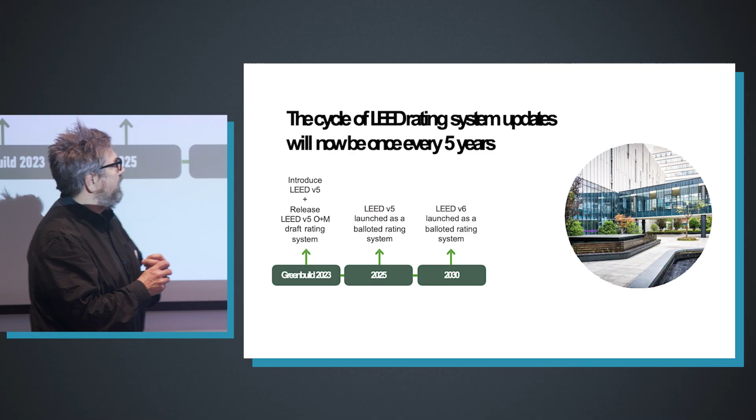So here are some of the major changes that they've talked about. The first is that the plan is a more predictable cycle of when LEED updates, every 5 years now.

Version 4 came out in 2013 -- well, really 2012, as John mentioned -- a little stale now, right? It's been around for 13 years and they haven't really updated it much, but now version 5 came out in 2025. We're going to have version 6 in a few more years, so it's going to be every 5 years.

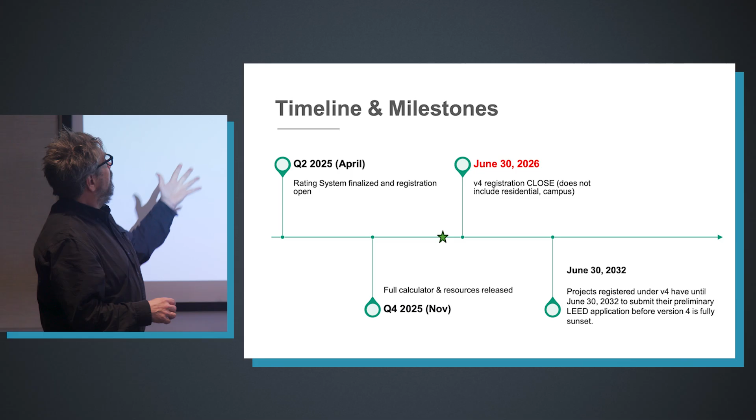And then as far as where things stand with version 5, right now it's been out for a year, but there's a concurrency period, and that concurrency period ends June 30th, 2026.

So if you have a project pursuing LEED version 4 and it's not registered, get it registered. If you have a project that is going to pursue LEED and you're not exactly sure where you want to end up, you might want to register under version 4 just to give yourself the opportunity. You can always upgrade later.

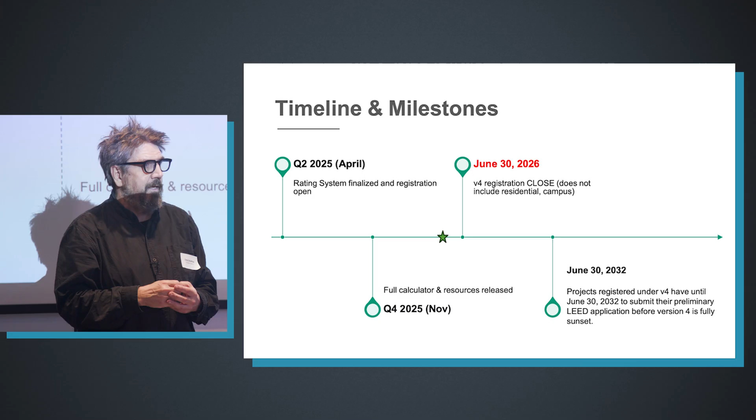Some of our clients are already on version 5, especially if we're working with public schools -- the MSBA is going to require everybody to be on version 5, if they haven't already voted that, which is happening in the next month. And other folks, especially on the private side, are locking in their version 4 so they have an easier target to hit.

And there's some time available -- if you do the lock-in on version 4, you have until June of 2032 to submit. It seems like that's like 100 years in the future, right?

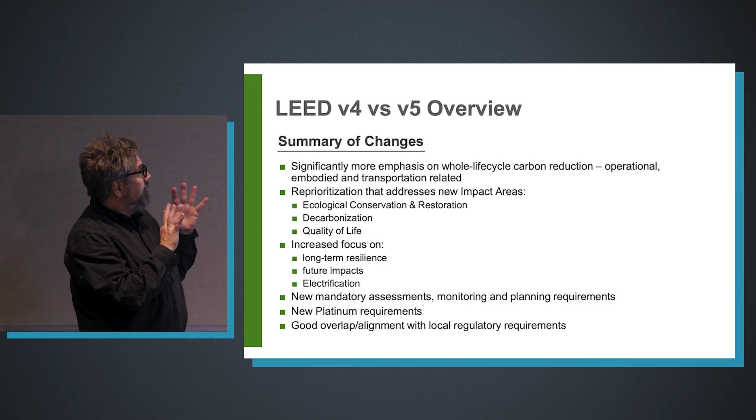So, the big picture summary of changes -- we're going to go through these in more detail -- but there's more emphasis on carbon, especially whole life carbon. We're looking specifically at decarbonization: operational carbon, embodied carbon, and the carbon that comes along with transportation.

They've organized the whole rating system into 3 impact areas: decarbonization, ecological conservation and restoration -- which is kind of what's always been there -- and the third piece is quality of life. The idea is this is really getting towards that triple bottom line, that sustainability isn't just how we protect the environment, but also how we treat people, and there's also the aspect of money -- wasting money is not a sustainable strategy, and that's not the intent in any of this either.

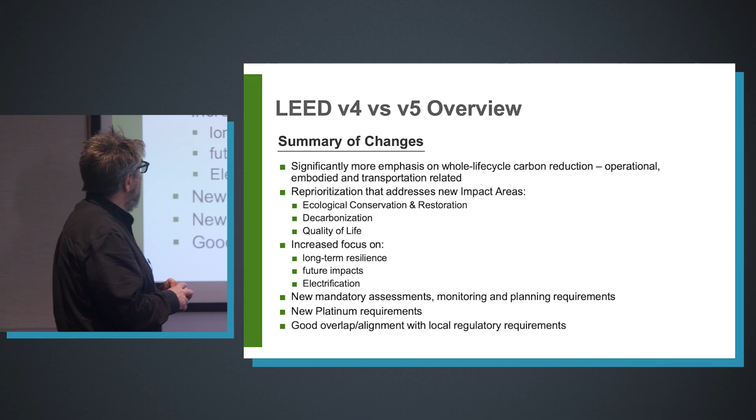Resilience comes into play. 25 years ago when I was first working with LEED, if you talked about resilience, you were admitting defeat. I guess we lost that battle, because now we're worried about resilience -- it's not about whether we're going to stop climate change, it's how can we survive this stuff.

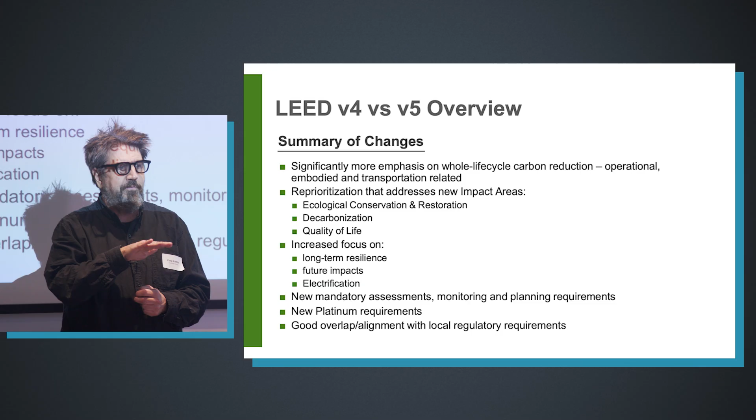And then the other big change is that they've really raised the bar, especially for platinum projects. So you'll find that getting LEED certified is probably not that much harder than under version 4, but getting LEED platinum is a lot higher, a lot harder bar now.

What's good news for us here in Massachusetts is that LEED version 5 has kind of caught up with a lot of the local regs -- we'll talk more about that -- but especially alignment around the energy code is very good here. Some of the local regs around embodied carbon line up very nicely with LEED version 5, so that's going to make things easier.

So as I mentioned, there are 3 different impact areas in version 5. It's interesting how this has evolved -- back in version 3, they had 14 impact areas.

13 of them were something called the TRACI principles, which were all just environmental impacts like eutrophication and ozone and things like that. And then there was a 14th one called indoor environmental quality. They went to version 4, had 7 different impact areas. Version 5, we're down to just these 3.

So I mentioned them already: quality of life, decarbonization, ecological conservation and restoration. And what we'll see is many of the credits try to address multiple here. It's not just one or the other, but as far as weighting of points, about 50% of the points are

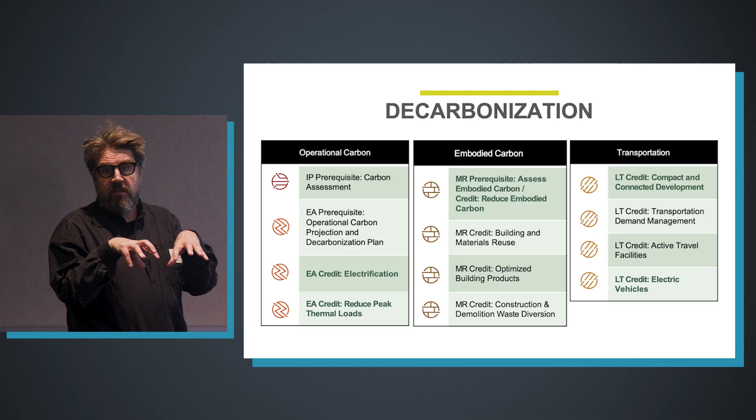around decarbonization at various levels. So some examples of things in the decarbonization bucket. Operational carbon, so this is going to be the carbon associated with the energy consumption of the building, and that gets into things like electrification, reducing loads. Embodied carbon, that's still the materials, so building reuse, picking the right products, diverting waste, and then also transportation carbon emissions, so transportation demand management, electric vehicles fit into that.

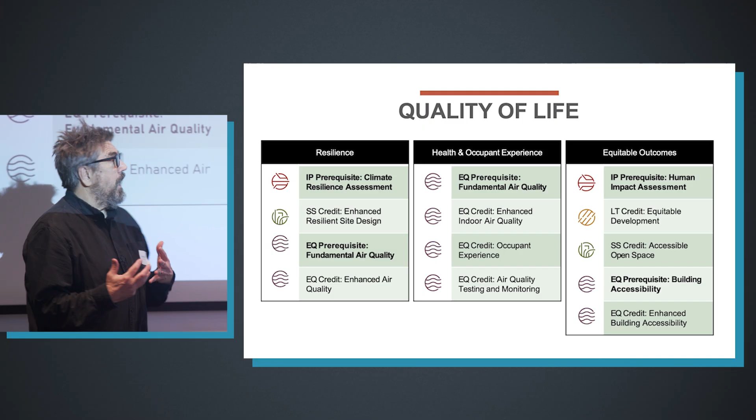Similarly, in the quality of life, specific areas include resilience. And so part of the requirements now are going to be an integrated process credit that's a prerequisite for doing a resilience assessment for your project. Lines up very nicely with the city of Boston, Cambridge, many of the MEPA requires you to do a resilience plan, look at the impacts of climate change, so it lines up nicely with that.

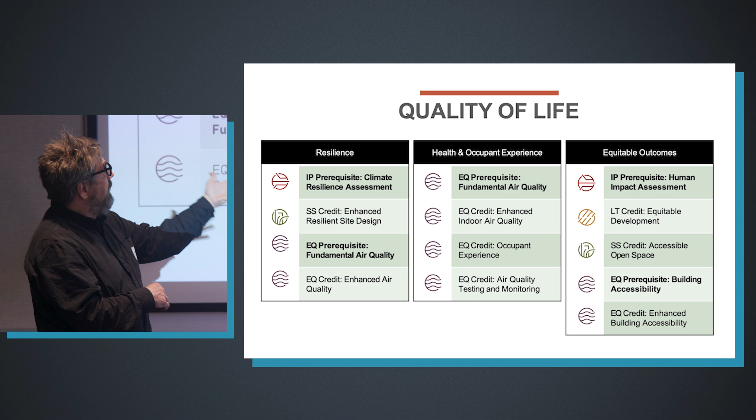Health and occupant experience, these are things that have been there before. They've kind of regrouped some of these credits to occupant experience, enhancing air quality. And then equitable outcomes, and this is one of the things that's been interesting is the names changed a little bit in the last few years because of the politics. So trying to let everybody play, but looking at equitable development, accessibility is part of the whole thing now as well. And just looking at the human impact are things they're going to look at there.

And then finally, the ecological conservation and restoration, very similar to what we've seen in the past. So we're looking at land use and stormwater and efficient resource use. Those are all parts of that approach there.

Right, so some of the things haven't changed in version 5. Still have the same certification thresholds. You're certified silver, gold, and platinum, with the note that the platinum is much more challenging. It's still structured in the same way with some of the mandatory prerequisites and then optional credits. You get credit points to achieve your certification levels. They have increased the number of prerequisites, and we'll touch upon a lot of those as we run through today.

And they've also changed the reporting, how you actually document compliance with LEED. If you've ever had experience with LEED Online, they're transitioning to their ARC platform now. What that allows for is it's a little bit more of a living platform too. There are some requirements on reporting energy and water use data that's always been in LEED, but really clunky in the delivery, and ARC is kind of making it such that they're going to be able to report that information.

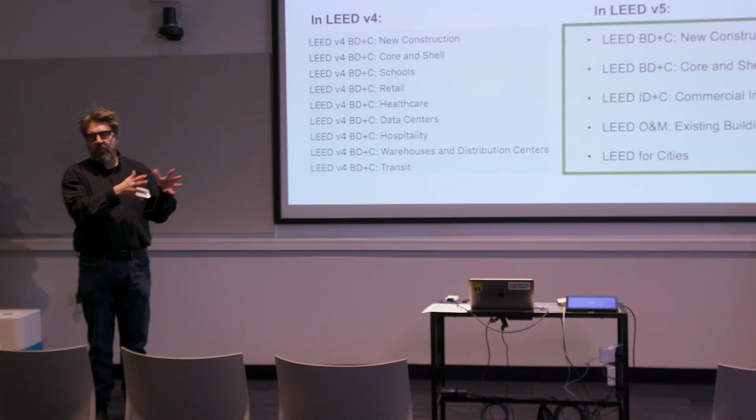I think part of what USGBC is trying to do is break down the barrier between the design and construction side and the operational side. So hopefully you'll use what you submitted in the design and construction process in the ongoing operations, and it could be if you want to recertify, for example. LEED used to be very much a snapshot in time around the design and construction process, and then once day one operation, well, you're a certified project, but away you go. They're trying to bridge that gap.

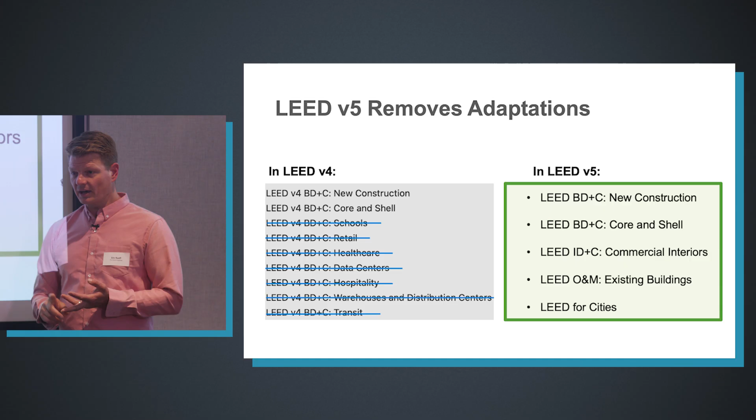Previously in version 4, there were a number of different adaptations for different project types and groups. They've streamlined that process and really boiled it down to the building design and construction for both just a new construction and a core and shell building, and then a commercial fit out system, an operations system, and then one for greater cities. So I've got to ask, does that mean you can't do a school with LEED anymore?

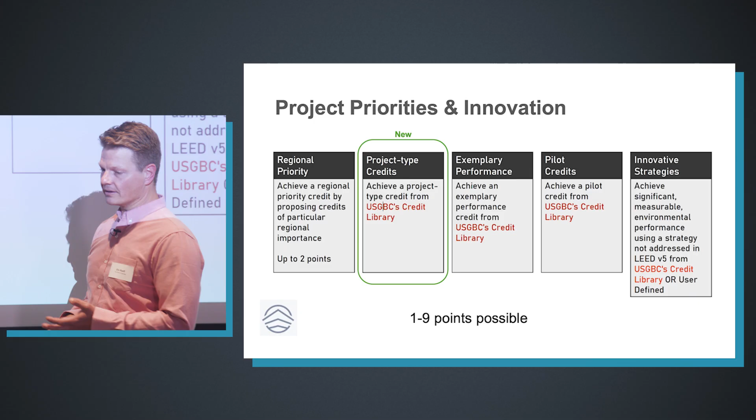Well, what they've done, it's like we've done this before, is the innovation section at the end of LEED has been beefed up. There are more possible points, and what they've actually done is put project-specific credits. So some of those ones that were more focused around schools in particular that used to be in that rating system are now found in this innovation and project priority section, along with all the strategies that you used to do, doing something exceptionally well, something innovative that is not a LEED credit, some of the pilot credits that they're beta testing, and then just those regional priority credits. Chris already mentioned this. This is a big deal.

Yeah, this is a big deal. To hit LEED Platinum certification now, it's not just hitting that point threshold, it's hitting that plus maintaining minimum points in certain credits of impact. Basically that's around a super efficient building that's all electric, that offsets its energy use through renewable technology, either on-site or off-site, and has shown a demonstrated reduction of at least 20% in embodied carbon in the building design. So those first three, that's all the available points. You're getting all the energy points, all the electrification points, and all the renewable energy points to get the platinum. It basically is driving platinum towards a net zero building, right?

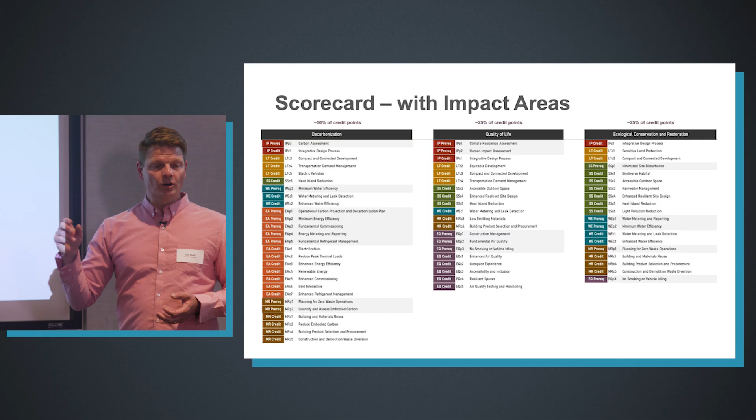There's some similar requirements for the existing buildings thing. One thing to note as we transition through, as we go through here, we're going to be focusing a lot on that building design and construction piece, the full building. I think that's what most people in the room are typically working on—you're designing or building a new building, or renovating a building that's a complete renovation, and so that would fit into BD and C.

This is just a snapshot of the scorecard that they've distributed, again by those impact areas. This is another way to show decarbonization is loaded with the most credits and the most available credit points—just a way to show it all together. But they still have categories, and they do that as well.

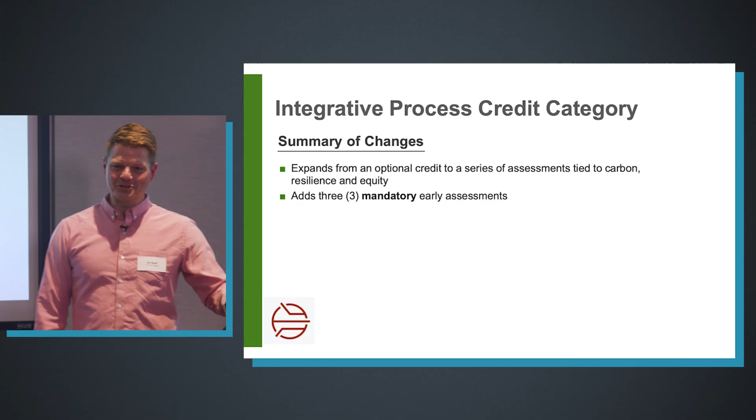So what we're going to do now is drop into those categories, and we're quickly flying through time already. What we're highlighting again is just some of those key elements that have been updated—a lot of them around the new prerequisites and the new way of thinking, a lot around some of these additional assessments that are required that are a little different, that we think the industry has to understand as we launch into V5. So if there's something you want to hear more about, raise your hand. We're ready to talk more about it, but if we talk at depth about all of them, we'd be here till tomorrow at noon. So ask questions.

So the first category is the IP, integrative process credit category. In version 4, there was just one credit for integrative process. That's been expanded—there are 3 mandatory early assessments and then some optional credits. Throughout, you'll see this little mapping: here's our version 4 scorecard, here's our version 5 scorecard. So there's still only 1 point, but there's these 3 extra prerequisites now.

So the first one of these is a climate resilience assessment. For this one, you're going to look at the hazards to the particular property. Those could be things like sea level rise—that would be a popular one in Boston—or it could be risk of wildfires, or earthquakes, or whatever kind of resilience things, higher temperatures, all of these extreme weather conditions. But the idea is you've got to assess your particular project and identify what those hazards are. That's the whole effort here, is the planning—thinking about what are the risks that we have for this particular project.

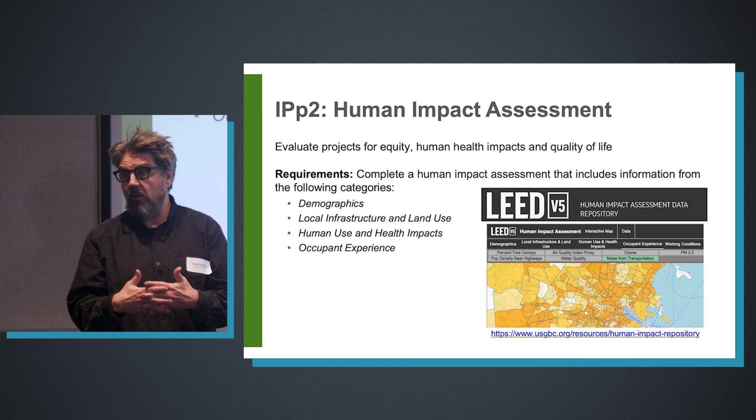The second one is the human impact assessment. Here LEED wants you to look at where your building is and what's in the neighborhood—who are the people who live nearby, who are your neighbors, who's going to build the building. That's important too, who's actually working on this project. And you're looking at equity and human health impacts—that's folding in that human impact, that health, that impact area. This website's pretty cool—USGBC has a tool where you can look up a site and it'll tell you things like you have bad air quality in this neighborhood, or there's a Superfund site. I decided to grab noise from transportation—there's noise from transportation. So that might be something you think about if you're next to the pike.

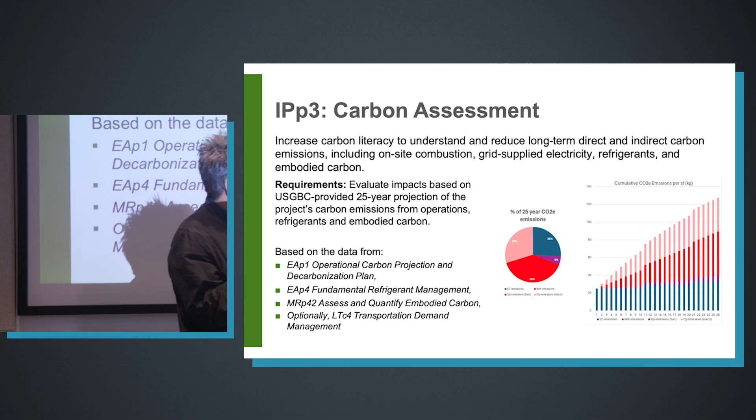And then the last prerequisite is a carbon assessment. For this one, what we're asking you to do is a 25-year carbon projection, starting with the business as usual—we'll come back and talk more about what you might do with this. But this basically makes itself out of a prerequisite in the energy category, which we'll talk more about. The idea is to project 25 years of carbon emissions from the project: operational, embodied, and also transportation.

Yeah, and this is where the USGBC is really building a tool that takes the data you give it to show you this overall lifetime impact, and the intent there is to start making decisions to reduce that impact.

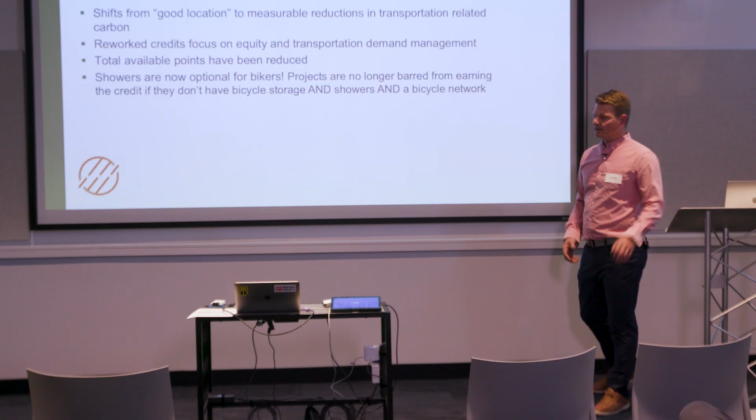One of the things we're seeing a lot more these days is people asking about embodied carbon. Is it relative to a baseline design? So on the operational side, you have a business as usual baseline, and then what you're doing to go down from that. Similar thing with embodied carbon, though I don't know exactly how that works in the transportation piece, whether there's a baseline there. But it creates some kind of typical based on your location. The prerequisite is just planning, it's not asking you to hit any targets, just asking you to figure out what the impact is.

Transitioning to the next category, location and transportation moves away from what is a good location to really focusing on the impacts around transit, recognizing the carbon impact associated with transportation to and from buildings. They've folded in an equity piece here, and pulled some of the points available in this category and shifted them into higher impact areas around energy and materials. They've also made some smaller changes, like you don't have to do the shower thing when it doesn't make sense, adding some flexibility in response to what works best in real life.

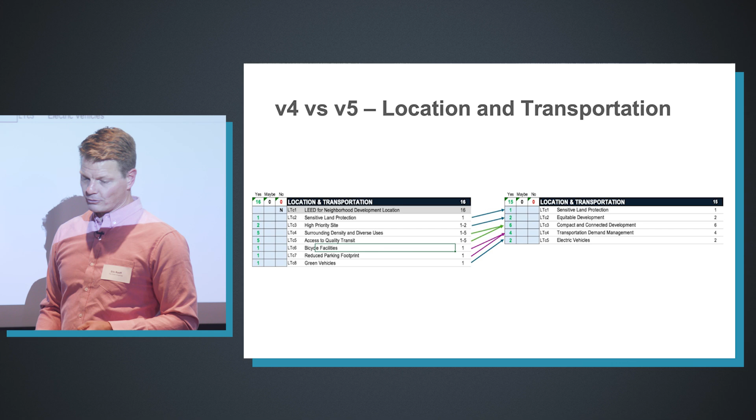Again with the mapping, you can see they've compressed some of the credits so there's fewer of them, mapped from four to five. Let's look at a few of these. This is one of the new credits, which has squished some of the old credits together, but it's got new elements that have never been in LEED before, around supporting the local economy through either job creation or affordable housing.

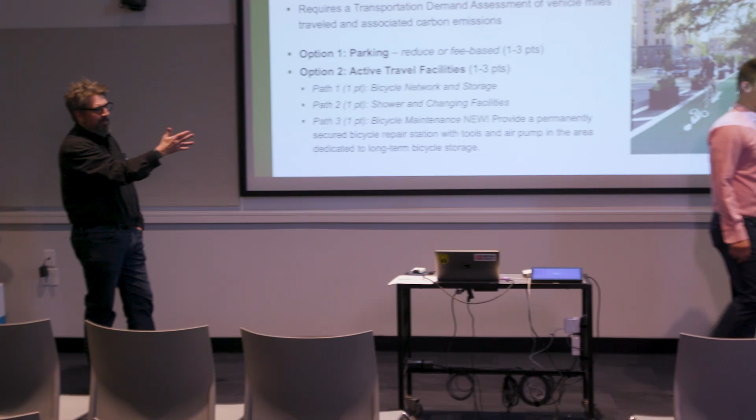And they also have skills-based elements here, which is particularly important for Chapman and construction managers. You've got some skills training for your teams, and you're eligible for some additional LEED points here. I'll ask a question: is that something you're already doing on projects? Does it give somebody like Chapman an advantage to pursue a LEED v5 project, maybe?

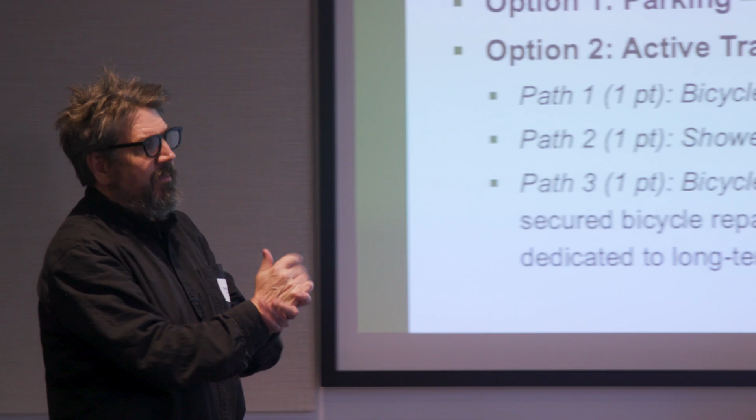But it's interesting because I think there's some overlap with people doing projects that are getting federal tax credits that still exist around things like ground source heat pumps, for example, with meeting prevailing wage and workforce training. You need to do those things to hit the maximum reimbursements, so there's some alignment there. It's interesting, it's not something people have thought about before in a LEED project, except maybe somebody doing that as an innovation credit.

And transportation demand management is a new credit here as well. This does have some elements we've seen historically, but it requires the development of a transportation demand management plan for a project. This is again where it may play nice with local regulatory requirements - a lot of this is required in Boston, so you can just use that for your LEED purposes. It does include some elements we saw before about showers and biking, and they're adding some bike maintenance elements too, which I like as a biker who may or may not need an Allen wrench now and again. So that's the quick summary of location and transportation.

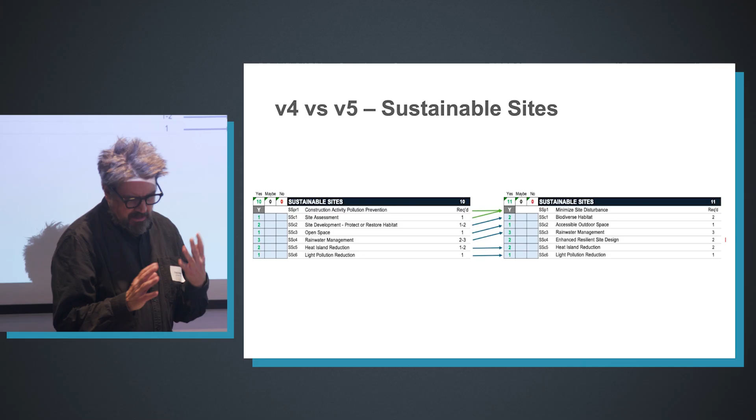Next we'll jump into sustainable sites. Back in version four, they split sustainable sites into two pieces, location and site, so this is more the things a civil engineer might be looking at. Resilience has become part of this, and it's gone away from minimize impact to restore - so as opposed to do less bad, more regenerative is the idea here. You can see the mapping again, we actually get an extra point in sustainable sites, but most of the credits are easily identifiable in the new credits, except for this enhanced resilient site design.

So this looks a lot like something you might have seen in earlier versions of LEED, preserving greenfield sites or bringing back a previously disturbed site.

One new item that's been a credit in the past as an innovation credit is the bird-friendly glass. So that's a credit now in LEED for all projects.

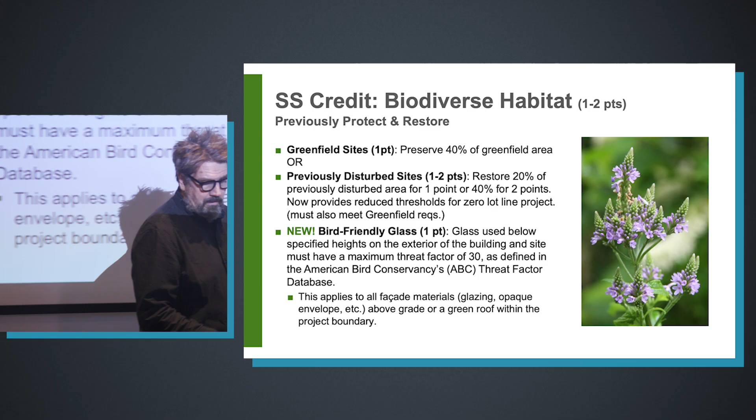Other parts that are new, I think it's interesting, they're looking at community outdoor space. So it's not necessarily the outdoor space that your project provides if it's part of a larger community approach, and publicly accessible during daylight hours. You guys kind of have that here with your ball field and tennis court right behind. But you can see how they're trying to push the boundary of LEED a little further away from just the project itself, to really think about the community and support and how to be a good neighbor.

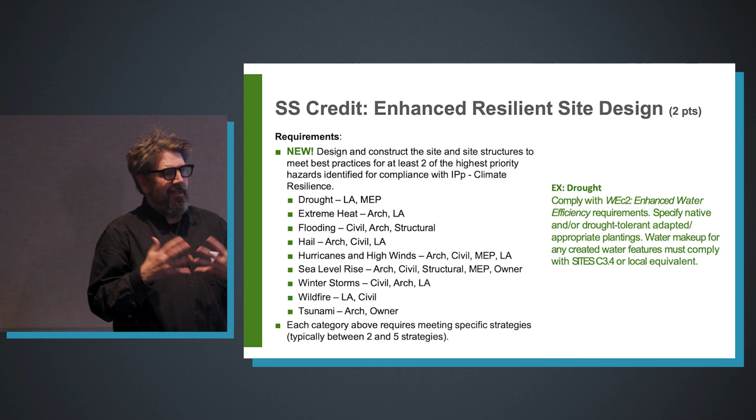And then the one that's new is thinking about resilient site design. This is the idea of building at the coastline, and how do you build a site that absorbs the high tide, for example, or in extreme heat, making sure that your plantings are actually drought-tolerant, or fire, making sure you're not building with exploding fire plants next to your building, things like that. So that's in.

So moving on, we're into the water efficiency credit now. What they're trying to do here is wrap everything, all water, into a bigger umbrella. They are recognizing some new ways to look at water that are different that we'll get into. And they've removed some of the challenging elements that the WaterSense labeling had, which has been a problem for more unique fixture types that other LEED projects have addressed.

And they've added a new element around water metering and leak detection. Again, they're doing this not only for being efficient with resources of water, but also thinking about the energy that goes into delivery and cleaning and treatment of the water in our systems.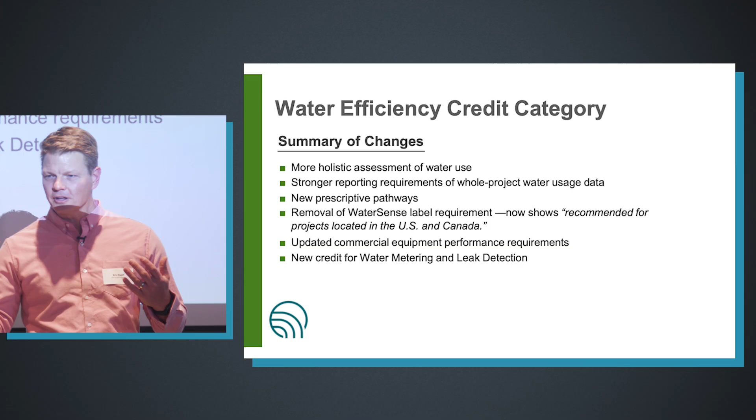There was an interesting stat I should drop in here: if you run your faucet for something like 15 minutes, it's the equivalent of running a 60-watt light bulb for 2 weeks, which you don't think about. They're trying to make that connection. Water has a carbon footprint too. Yeah, that connection of water, the carbon footprint of water.

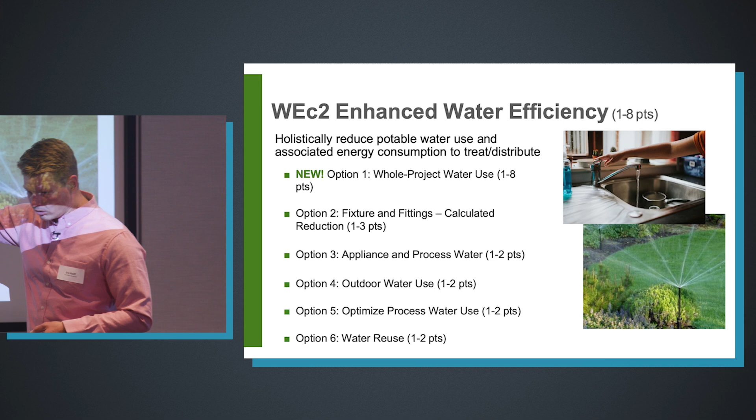But what you can see, they moved a lot of things into one credit to look more holistically, and it's really around this credit of enhanced water efficiency, where they've got options galore, and they've brought in these holistic pieces, this whole project water approach. You look at everything together, that gives you the most points if you're able to think holistically. If not, you can look at things individually, and there are individual points available for project teams there. They're really promoting water reuse in a way that's different here. That will be interesting to see how the market responds to that.

All right, and energy, so this is my favorite category. I worked on this a lot. I think it's the most transformed category. A principle that the developers of LEED version 5 followed through all the categories, but certainly was affecting our work with energy, was to think about what do we want the building of the future to look like. Thinking about a building in 2050 or beyond. Buckminster Fuller did that, of course, but not everybody wants to live in a geodesic dome.

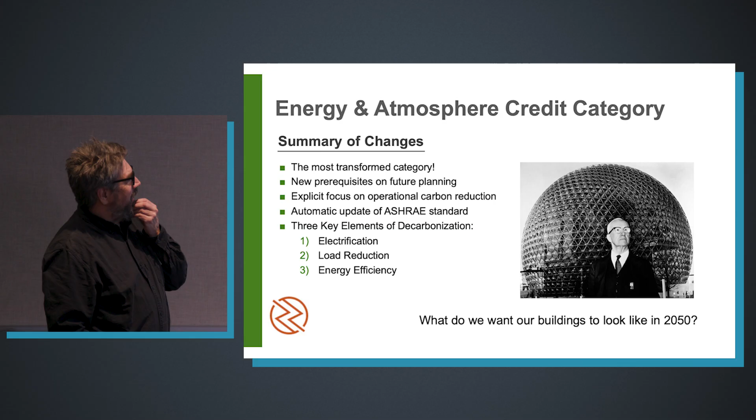But the first thing to talk about again is the prerequisite. So we've got an operational carbon projection decarbonization plan. We're going to do modeling or some other way to benchmark, to establish a goal for the project and understand how much energy we expect to use. And then from that, we're going to create a carbon projection, looking at the emission factors today, but also into the future, to see where we're headed. And then as part of this decarbonization plan, either the building itself will be decarbonized by 2050 — if we're all electric and using renewables, that'll happen — or we're going to think about how a future user of the building will decarbonize.

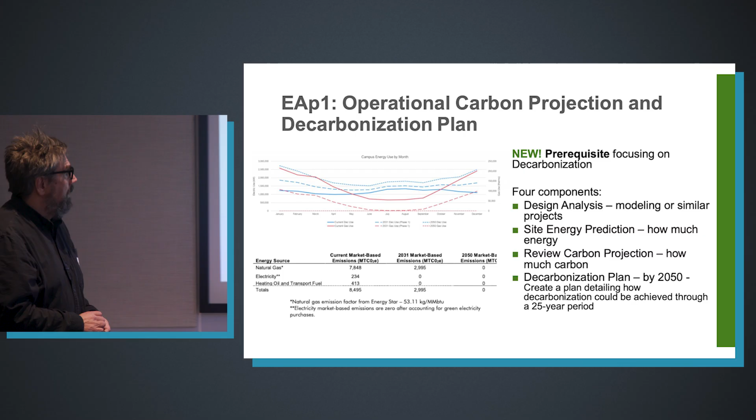So if we are putting fossil fuels into the building, how are we going to change that out at some point in the future? What's the plan for doing that? This creates at least a 25-year plan, and that feeds back into the overall carbon plan for the project that we talked about in the integrated process credits.

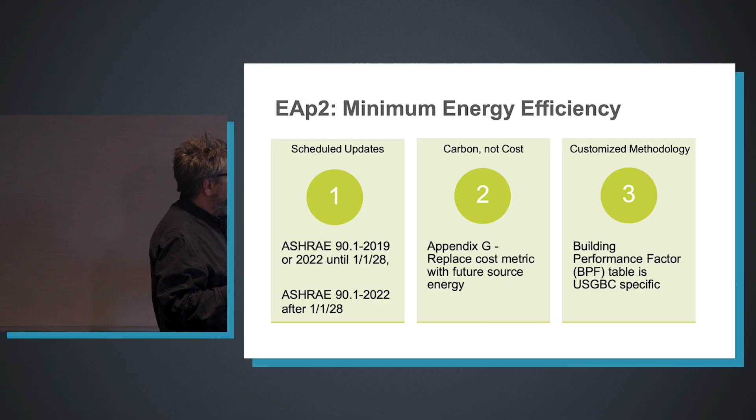Second prerequisite is minimum energy efficiency. Good news: it's now aligned with the Massachusetts code. LEED version 4 had been referencing ASHRAE 90.1 2010. But now we're at 2019, which is the same version the state of Massachusetts uses for part of the stretch code. What's built in now is that we automatically go to the next version 6 years after it's adopted. ASHRAE 90.1 2022 actually came out in 2023, because ASHRAE gets a little behind.

So if you're doing a LEED project that registers after January 1st, 2028, you're going to have to go to the 2022 version.

Also, previous versions of LEED had stuck with the metric of energy cost. So we've seen a lot of projects in places like Massachusetts where we're switching out fossil fuels for very efficient heat pumps. Electricity costs more than gas, so we're not necessarily showing a cost savings. There's been some workarounds, but now it's in here.

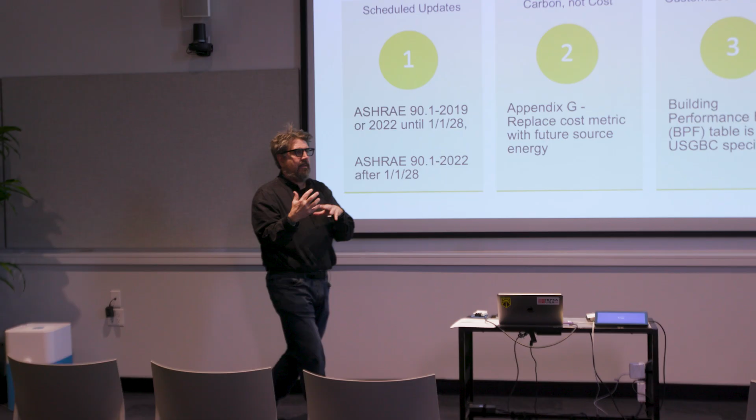This is in the weeds for people who run energy models, but we're looking at carbon, and there's some customized methodology. There's a different method that ASHRAE uses, and some custom factors specific to LEED. Actually the metric is source energy, not cost, but it's source energy with a future-looking metric. So it's going to support electrification and low carbon design.

You're also going to calculate the carbon. So the one big energy credit - in this case we've split it into 3. Everywhere else we've been taking credits and mushing them into one, but here we split it into three.

5 points for electrification. Option 1, no on-site combustion - you get 5 points. So guess what? If you meet the opt-in code in Massachusetts, you're going to meet that. Option 2, you can get 1 to 4 points depending on what you electrify. So even if you're not all electric, as long as you're using fossil fuels only when it's cold out, you can get additional points.

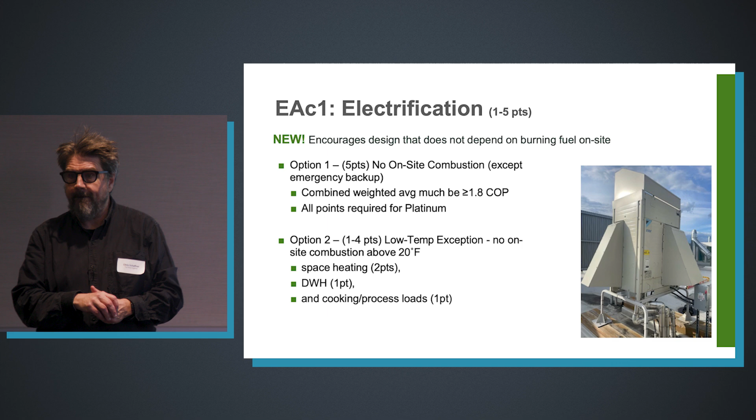So the one piece here is the cooking and the process loads. Question: what about for process buildings? A process building still has to be all electric if you want option 1. Water treatment plant - that's an interesting one, using fossil fuels in what way? Pumps. Not full electrification for building heating, cooling, everything, but I guess for backup pumps.

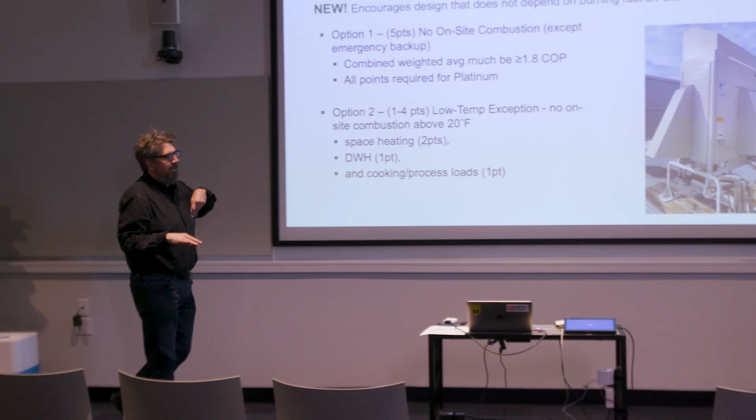Oh, backup - so the backup is okay, you're allowed to have a generator. Even for the electrification standard, a generator can still be a fuel source other than electricity. This is not a prerequisite, it's a credit. So if you don't get all these points, it's okay, except that you need to get all of option 1 if you want to be platinum.

You've got to be fully electric if you want to be platinum - that's the first piece of getting to platinum. But again, all those other process loads, cooking and standard process loads, those have to be electrified as well under option 1. And option 2, you could get points for other parts, but you can see you have many fewer available points than going for the full electrification intentionally.

The second part is reduced peak thermal loads - somebody in our office called this the child of TEDI and PHIUS, if you know what those things are. There are prescriptive options showing reduced peak loads, and also a calculation option where you can follow Passive House or ASHRAE 90.1, and instead of looking at reduction in total energy consumption, you're looking at reduction in peak loads. So again, thermal bridging is going to line up really nicely with what the current state energy code is requiring us to do.

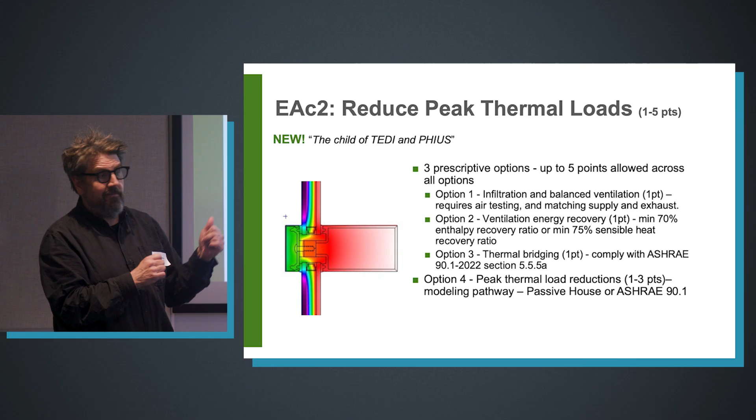And also in this is another one - air testing. Air testing is not required, but you get points if you do it. Air testing is a requirement of the Mass Energy Code now for all new projects, so it lines up really nicely there - same for infiltration. And then the last piece is enhanced energy efficiency.

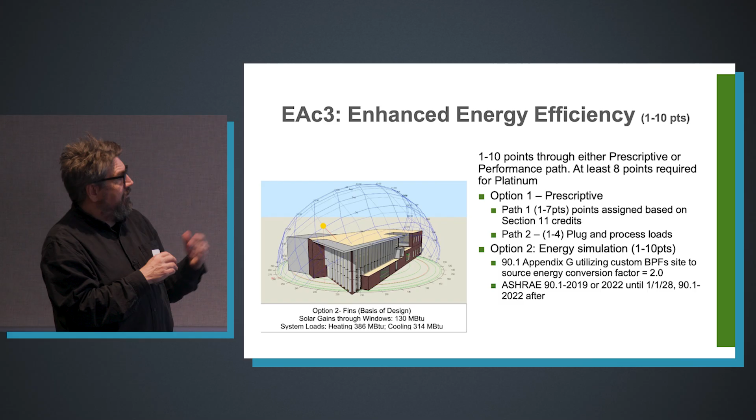One of the things we tried to do as this was developed was to give equivalency in terms of points available, whether or not you're running a model. We run models all the time, and it would be great if you hired us to do models, but we recognize not every project can do that. It's been a barrier for some projects to pursue LEED because they needed a model just to show prescriptive compliance with the prerequisites. So here you have equal weight paths: prescriptive or energy simulation. Prescriptive gets you points based on different strategies incorporated, up to a total of 10 points, or you can run an energy simulation for up to 10 points.

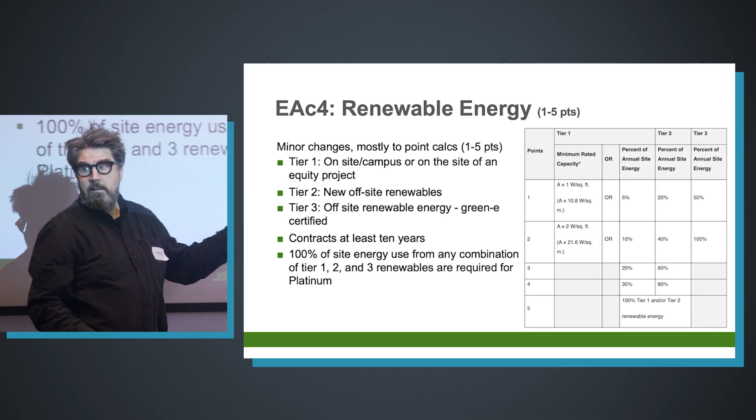The last thing we're going to talk about is renewable energy. In the past we had a difference between on-site and off-site renewables. Those have been brought into a single credit, and now you just get different weighting. The best thing is on-site renewables, but if you have off-site renewables, depending on what they are, you get full or partial credit for that, so it counts against your usage. To get the 5 points you needed to reach platinum, if you're offsetting all of your electricity, whether on-site or off-site, and have no fossil fuels, a net zero building, whether on-site or off-site, will qualify.

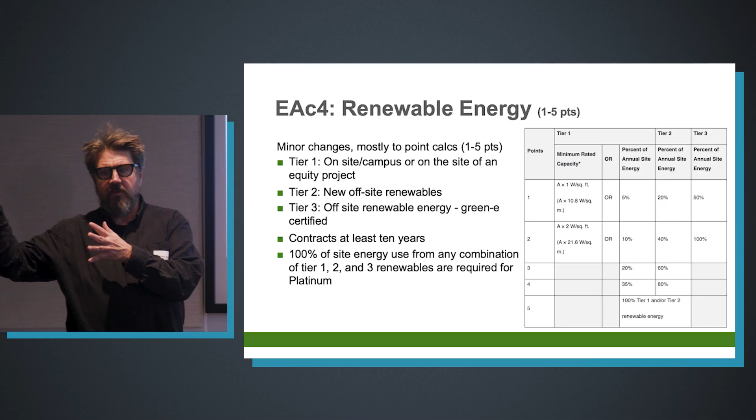It's interesting because we see a lot of our larger portfolio clients doing renewables often in a portfolio sort of way. We showed earlier the BU data center building, which BU says is net zero. Their way to get there is it's all electric, it's energy efficient, and they're putting up wind turbines in South Dakota. The wires don't connect South Dakota to Commonwealth Avenue, but in their bookkeeping, they've got that all covered, and that works. That's what people do.

Let's pause on energy for a second to see if there are any other questions, because that is the beefiest credit category. And we skipped a couple things - there's some discussion of refrigerants, which everybody loves to deal with, and also credits for demand response and being grid friendly, which has some new language in it as well.

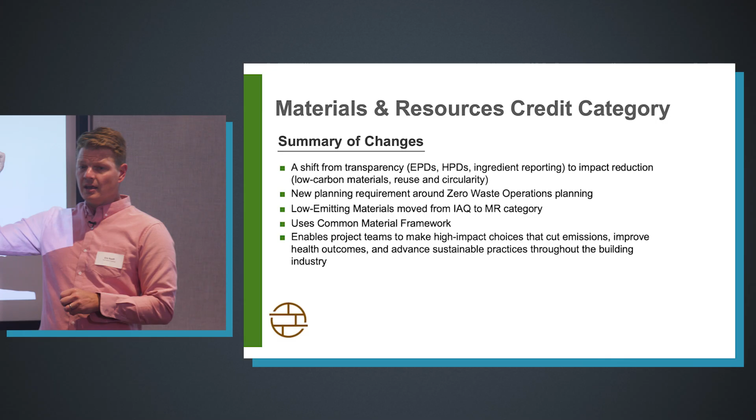Moving on to the material and resources category, another one that will be of particular interest for the construction folks here - they've slightly adjusted this category. Version 4 really introduced some new concepts and documentation requirements to the industry that caused some waves and headaches when it was originally introduced. That was really about EPDs, environmental product declarations, and HPDs, health product declarations. What they were looking for there was just reporting and disclosure - just give us that information. That was their way to push the marketplace to create more of these and get manufacturers to start disclosing the impacts of their materials.

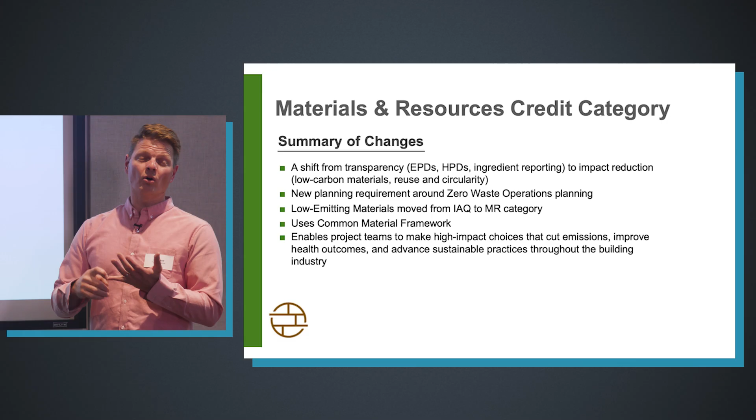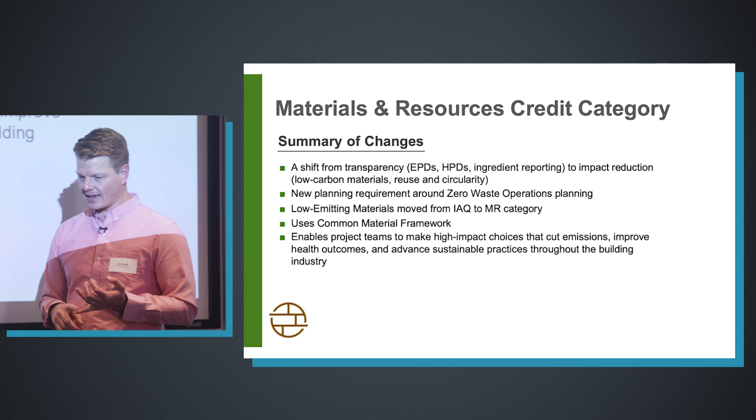That was version 4, and now they're going a step beyond that. Now they're saying you have to show you're meeting certain criteria to actually be eligible for the points - it's not just about counting your EPDs anymore, it's about the quality of the EPDs and what the EPD reports. They're also looking more at the planning around how you deal with waste more aggressively in building operation. They actually moved the low emitting material credits - all your paints, coatings and applied materials - from indoor environmental quality up to the material and resources category, which makes logical sense and ties it together with this new common material framework being introduced as part of LEED version 5, that we'll get into in a bit. What they're really trying to do is tie it back to health impacts and emission-related impacts of the materials.

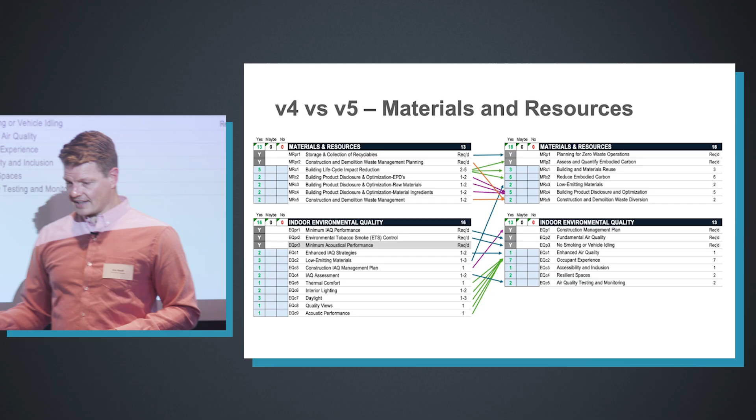Besides that, they have taken those BPDOs, the building product disclosure and optimization credits, and pushed them into a credit that we'll talk about now.

One of the new things they're introducing in V5 is also more robust requirements around embodied carbon - this is the carbon that we lock into a building with the materials and construction methods we use. It's looking at the carbon impacts associated with the sourcing, manufacture, transportation, and construction of the materials in our projects.

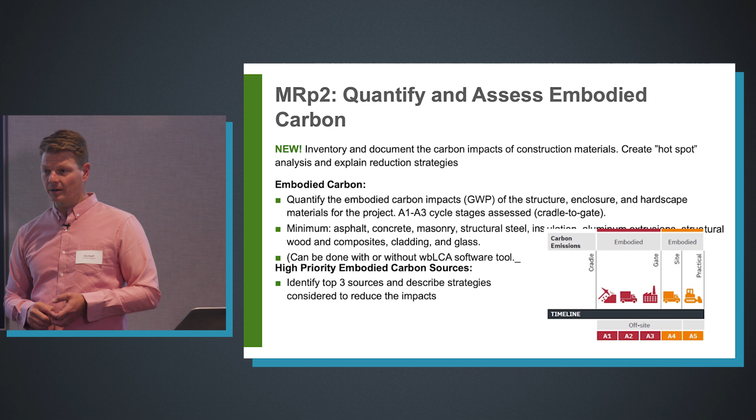This is wildly important because this is the carbon you're burning and putting into the building now, whereas operational emissions are future emissions. So LEED is really pushing to reduce and get folks to think hard about the embodied carbon that goes into the buildings.

What they're doing is they've put a prerequisite here. There's no threshold to hit on reduction of your embodied carbon for this - that's linked to a credit - but they are making you do this study. You can do it through a whole building LCA, which is its own computer simulation that takes all the impacts of materials and gives you a full picture of carbon impact, or you can do it through a prescriptive method using those EPDs, those environmental product declarations, to quantify carbon in more of a prescriptive manner.

One thing to note here too is that integrated process credit for carbon we saw back there as a prereq - this is feeding back into that as well, so these things are all linked. It's set up as 3, actually 4 separate prerequisites, but they all kind of fit together into that one big picture of the whole life carbon for the project.

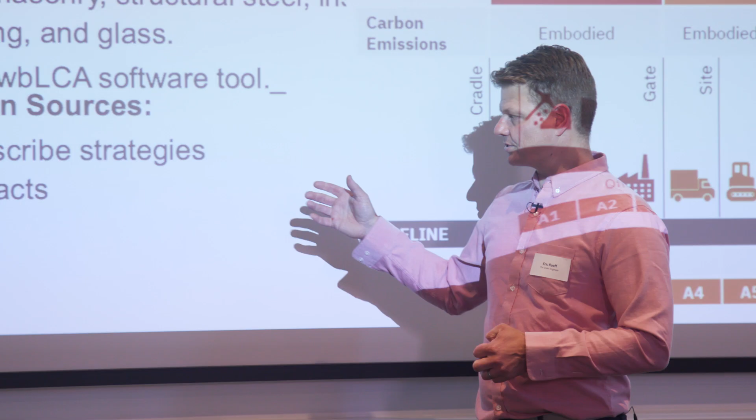What they want you to do after you've done this initial study is identify your heavy hitters - you do that hotspot analysis. What are the materials that are most impactful from a carbon perspective? For the prerequisite, it's all about what are you doing to address that - give them some sort of narrative. They want you to start thinking this way as a prerequisite requirement. Again, no threshold to hit, but just forcing you to take that effort.

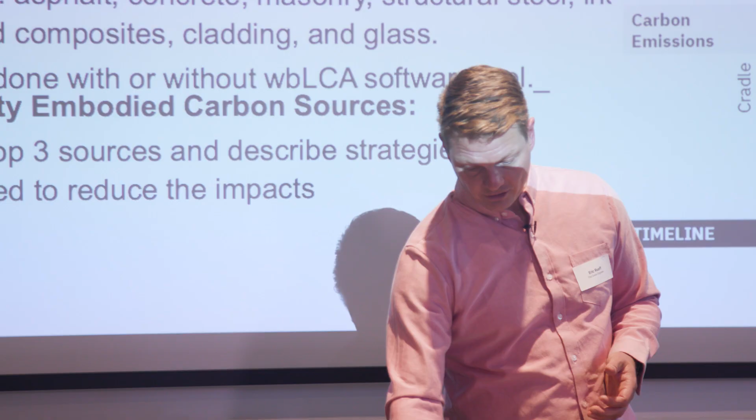One more thing worth mentioning here is you may have seen the city of Boston has been bringing embodied carbon requirements into zoning. Newton actually has done that - we did that here on a project in Newton. And the state has been talking about creating embodied carbon requirements for new construction as part of the next edition of the building code.

This is kind of putting you in a good place, and it's hopefully going to align with those requirements. There's even talk around the Mass Save utility incentives trying to figure out, can we incentivize embodied carbon in some way too? That's seemingly the furthest one away, but it's where LEED is helping play nice - my hope is that as people create standards, they choose to align with LEED so you could do the same thing in both places instead of having to do two different things. One frustration with version 4 lately has been that it's so old you end up having to do one thing for that and something else entirely for your local regs.

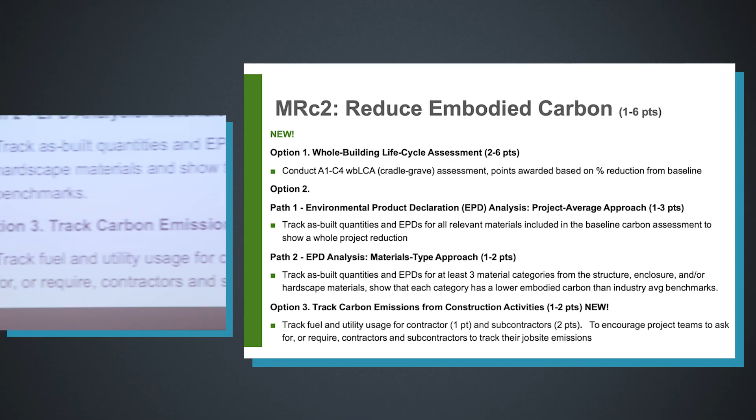This is just the credit linked to the prerequisite. Again, there's different options - this one will have you do a whole building LCA for the most available points, and there's some reduction requirements. This is one of those platinum credits too, where if you do platinum, you have to do option 1, a whole building LCA, and demonstrate you've reduced by 20% to be eligible for that platinum piece. But they do still allow for this EPD method.

And then they also have this new requirement that's particularly important for CMs here, where they're looking at tracking the energy and carbon impact around construction itself.

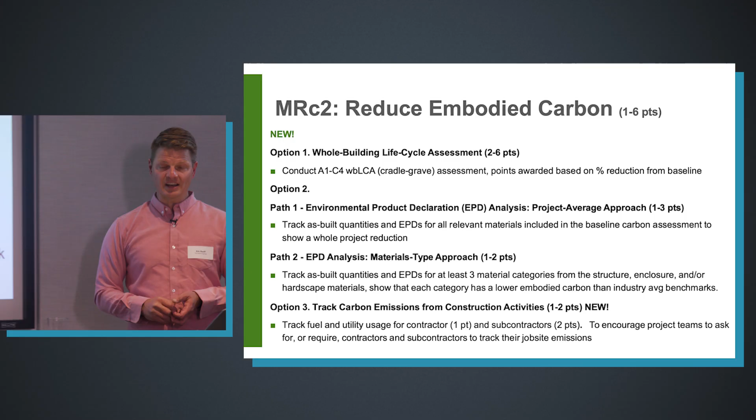That'd be convenient. What we see already is architects say, yeah, sure, the contractor will do all the recycling and we count on those points - now we can say we'll make the contractor do this too before we've hired the builder. That's just transparency, there's no reduction required. This is only tracking.

Have you all done this on a project ever? You guys do that?

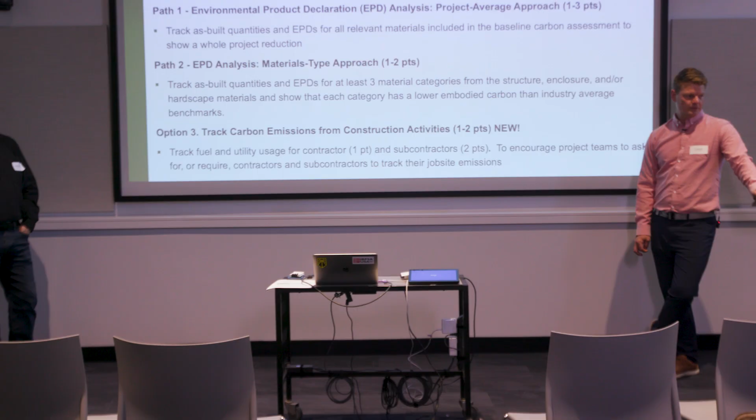We started doing electricity, and then we just track fuel on a project too. You track transportation to and from for your folks? Transportation is tough. Yeah, it is hard, isn't it? You don't know if the truck going from the factory to your job site is stopping somewhere else. And what's the mileage?

It's hard. I was on one project where the sign-in sheet at the construction meetings, at the trailer, we had to write how we got to the meeting and where we came from, and somebody somewhere was adding that stuff up. Seems like the tracking, the least of the worries is field reports, or the guys checking in, everything comes to the job site.

So instead of asking you, where's your house? Just using their main office. Yeah, that makes sense. It's like round trips for sites. But that's got to be such a small number compared to the embodied carbon of the steel and the structure, I would think.

Yeah, but it adds up when you have like 60 people driving 40 miles, trucks and all that, it's much higher. We did an analysis on a company fishing trip last year where we go down to the Cape, and the emissions were like, I think it crushed our emissions for the entire year.

Oh no. Do you catch fish at least? Yeah, I think I saw it in the kitchen. The stripers, is that what you guys are going after?

Good for you. So we mentioned this common material framework, right? This is kind of a conglomeration of different organizations: AIA, ILFI, WBI, all the letter salad here of different agencies that have come together to put together this common material framework, and they're really looking at these areas of impact.

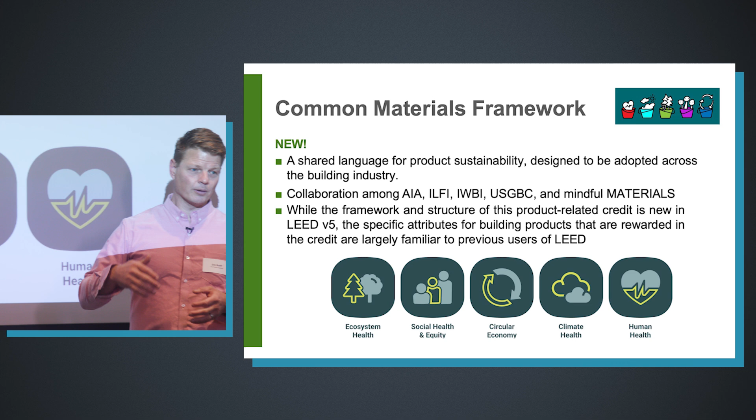Around human health, circular economy, climate, social health and equity, and ecosystem health. And what they're now using is looking at how many of these different criteria your products support. What are they doing in some way to lessen their impact and to support these particular areas of import.

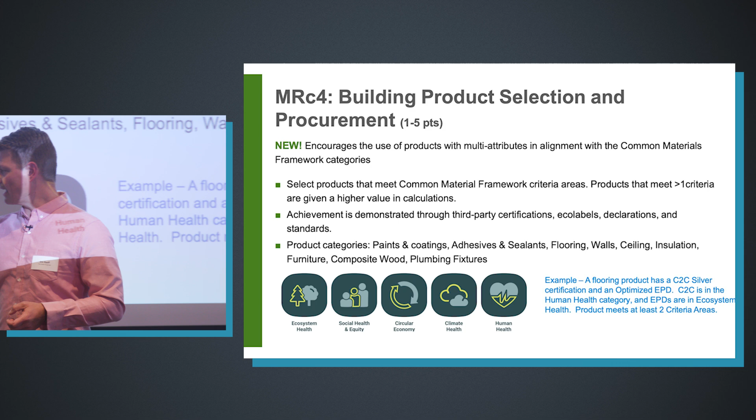And so what they've done is fold that into the new material tracking credit, where this gets a little crazy, but they do have calculators to support this, where you're looking for multi-attribute materials, where a material may show a reduction in embodied carbon and have some social benefit, and so that's a multi-attribute material now. It will then contribute to achievement of this credit. Put it in a big spreadsheet, mix it all together, and based on how well you do, you get points based on that. We can look at that in a little more detail at the end, if we have time.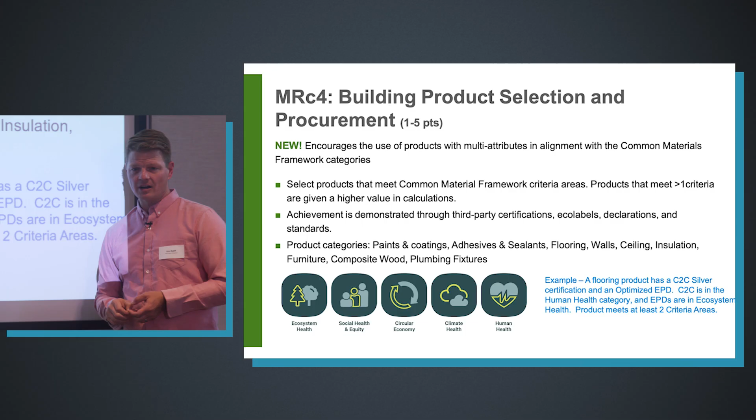So a lot of this is around some of those third-party certifications that you know from a lot of materials, the Declare labels, cradle to cradle. There's a whole mess of them here. And again, this is where some of the logic of taking those low-emitting material credits, bringing them from EQ into materials, is that it's really looking at a lot of the same elements there, and so they're bringing together that low-emitting material piece to be part of this category. It's in a different credit, which we'll talk about next, but then you're looking not just at the emissions associated with those materials, but some of these common material framework elements as well.

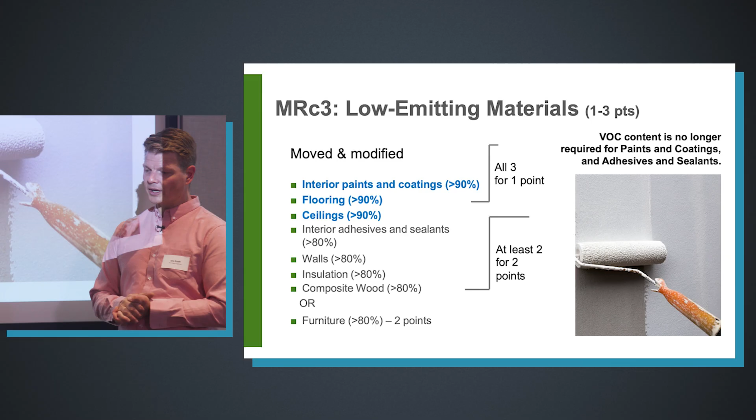So low-emitting materials, what they've done here is just make you do more for less points. Again, that's part of raising the bar here. So you do have to hit all of these first three on top in blue just to get one point, and then you do have some options on other categories.

What they did in LEED version 4 was introduce— previous versions of LEED used to be about VOC, the content of VOCs in your materials. Version 4 introduced emissions, so it's not what's in the product, it's what comes out when you're applying it. So there was both in version 4, and they've gotten rid of the VOC content now in this latest version, and they just care about the emissions associated with the materials. Yeah, that makes more sense, because that's really the impact to the installers and to the end users as well.

Right, oh, this is going to be a favorite here. So construction, demolition, waste diversion, right? They've actually tried to simplify this, but in doing so, it's going to prove to be a little more challenging to hit.

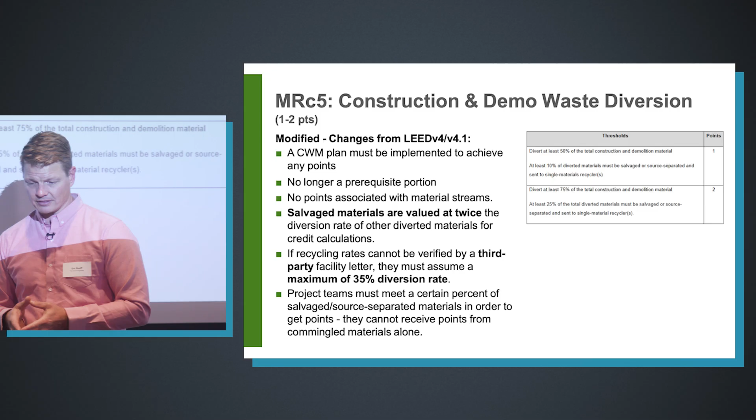There's no prerequisite associated with the construction waste management plan. You just have to do it to get this credit. What they've really done is there used to be a number of streams, and they've simplified that. But what they're really doing is targeting commingled waste.

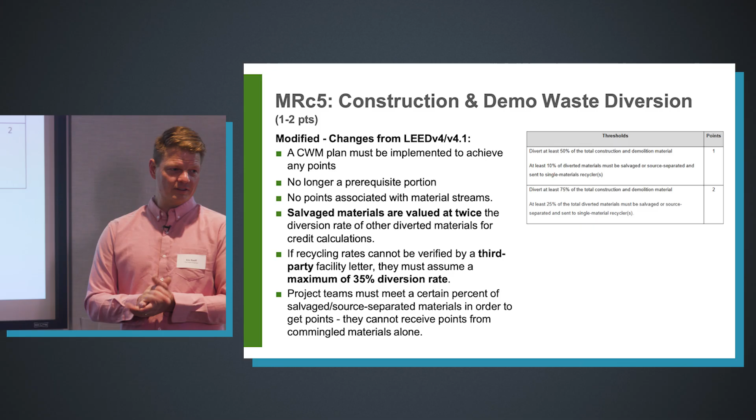Historically we got letters from waste receiving facilities claiming some magic percentage of what they recycle, and that was harder to verify. It turns out that people think that was all BS.

So what they're saying is, if you're doing commingled waste, the percentage you can claim is much less. We used to see 90s out of those reports from some waste receiving facilities, and some projects had over 100%, because they recycled things like picking stuff up at the dump and pulling it, as if recycling demoed materials from before the project.

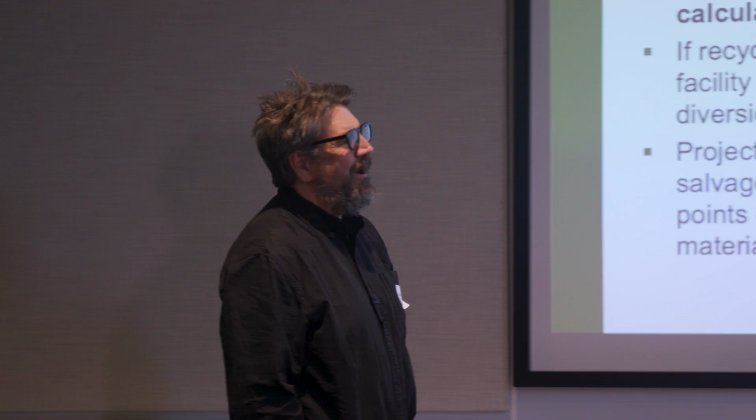We did the MassDOT project right on the Pike, and the site was full of Jersey barriers from before the project. They recycled it by weight, so man, did we nail it on that one. Their recycling of the Jersey barriers consisted of putting them in a different part of the highway, I think. Sending them to Jersey? No.

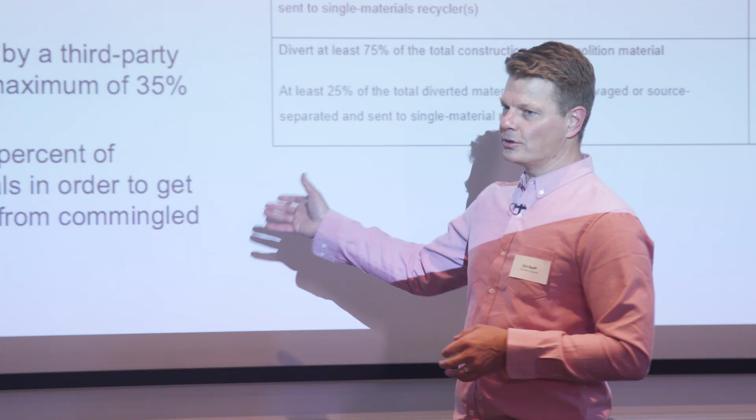What they're really trying to push for too is salvage and reuse here. But this credit, while they streamlined it, is going to prove challenging to get.

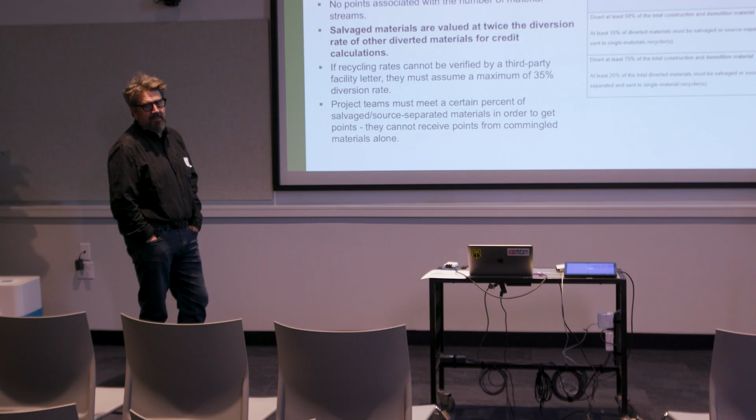I think honestly the recycling market has changed a lot. It used to be a lot of commingled waste was getting shipped overseas, and those countries have stopped taking this stuff. So we're seeing that municipal recycling programs are costing more for the towns and getting less recycled than before, unfortunately.

So reduce is the first thing, right? All right, so the last category we want to talk about is indoor environmental quality - human health, equity, and experience is part of this. We got rid of the materials, those are now all in the materials category, and introduced a new prerequisite around something.

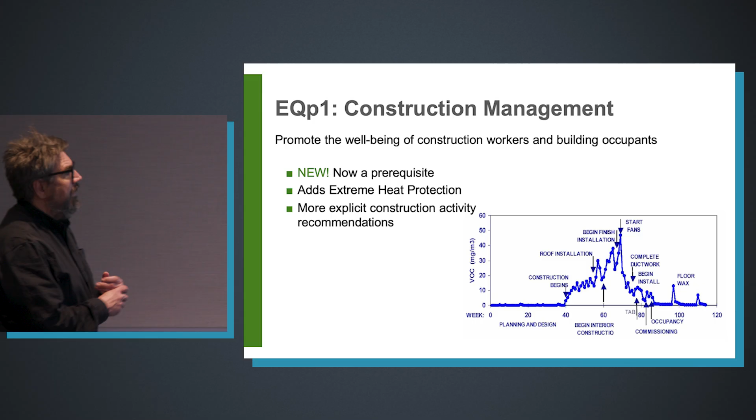So here's our diagram again. The prerequisite is around construction management - that used to be a credit. You get the construction management IAQ plan and make sure you're delivering clean and dry. That's now a prerequisite, not a credit. One thing that's added is heat protection for the workers in the building. Probably less of an issue around here, but if you were building in Arizona, you'd definitely want to be thinking about that.

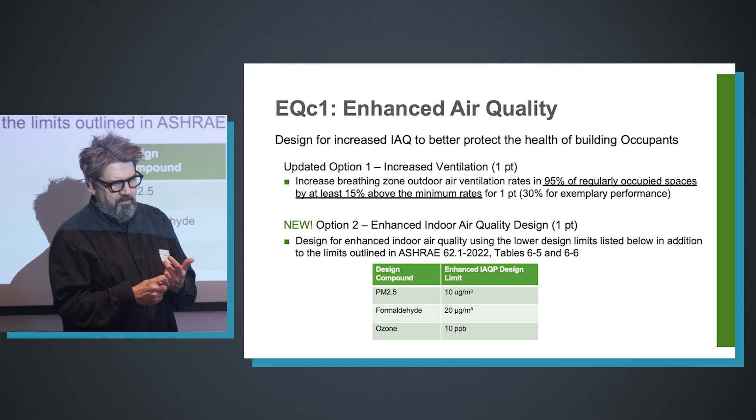A lot of credits have been combined, so enhanced indoor air quality gets you increased ventilation or different air quality design. They're looking at some different compounds of concern too - not just CO2, but PM 2.5, formaldehyde, and ozone.

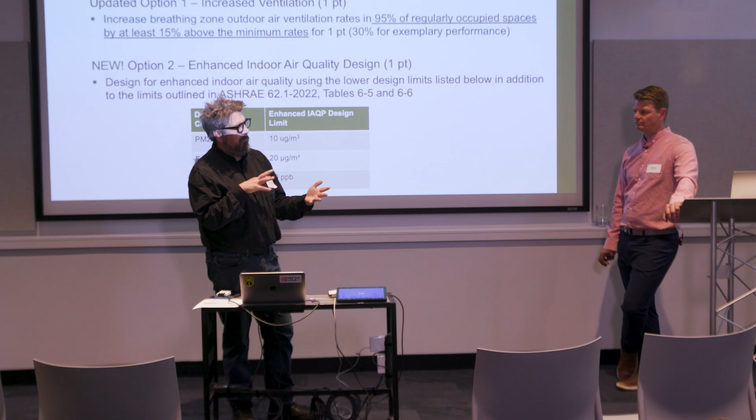So bringing in a more holistic look, with a big alignment here with WELL, right? They've created crosswalks between WELL and LEED, so if you're doing both on a project, meeting the LEED requirements can meet WELL, and meeting the WELL requirements can meet LEED. Part of that is air quality - not just designing for it, but testing for these pollutants at these levels.

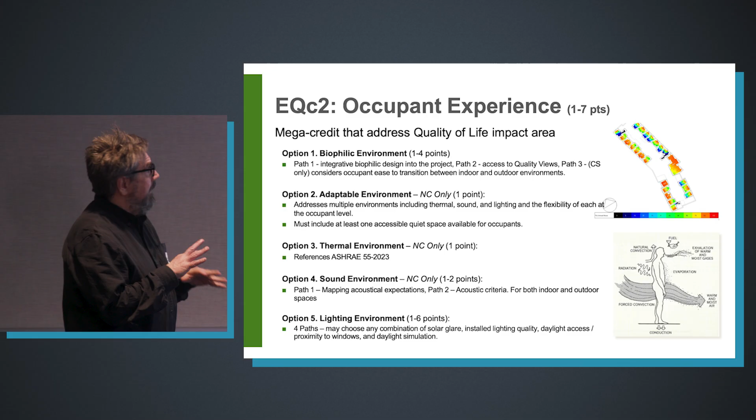And then occupant experience - these have brought a lot of things together. Some we had before, like thermal environment and lighting, combined with things that were maybe innovation credits in the past, like acoustics, and brand new things like a biophilic environment, an adaptable environment. So accessible spaces are part of that.

What do we got in the pictures? Daylighting, and this is a person and all of their heat transmission to the world. So we use the ASHRAE 55 standard - we're still trying to create a comfortable environment, giving people control.

New credit around accessibility and inclusion, so being ADA compliant and whatever else you have to meet there. And then they have additional stretch goals - they've got a bunch of categories or strategies that you can focus on. Again, this is looking more at human health and well-being in a different way than LEED has done in the past.

The last one we're going to talk about is resilient spaces - this is again talking about planning for resilience, from a few different options. So episodic outdoor ambient conditions - that's when you've got wildfires and you can't breathe.

We've all experienced that here in the last year. You get smoke from the fires in Canada and you don't want to open your windows, so hopefully your building has filters you can use, or the ability to put filters in that'll help with that. Management mode for respiratory diseases, what could that be?

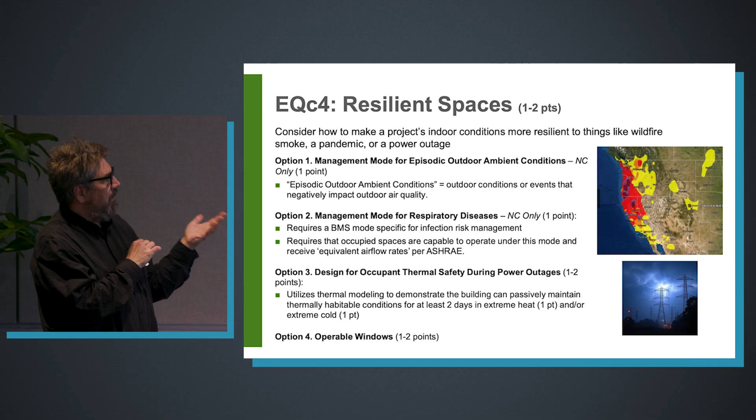Now we want to think about how your building is going to deal with the next pandemic. Hopefully we don't have to do that. And then power outages and how you deal with them - a little passive survivability piece there. It depends a lot on what the building is. If it's an office building and the power goes out, really all you want to do is get people out and then drive home or get home some way. But if they live there and the power's out for days, how do they flush the toilets, what's the temperature in the building, and can people actually stay there? We want to design thinking about these things.

Operable windows, my all-time favorite passive resilience strategy. That helps with COVID too, by the way. Everybody remember when buildings that couldn't open their windows, couldn't bring in any outside air - nobody wanted to be in those buildings. Got some operable windows, you can solve all these things.

I saw asphalt was one of the materials that needs an EPD. I've never seen an EPD for asphalt, so I was just wondering, is that like concrete? Is it local? I just don't know.

So I think the way EPDs work - and Eric, you can correct me on this - is you've got different, you have manufacturer-specific EPDs, or you have material category, industry-specific EPDs. So basically all asphalt has this, basically - it's what you're putting in there. But again, they're trying to expand who's doing all this testing of materials. It's worth going back and thinking, what is an EPD?